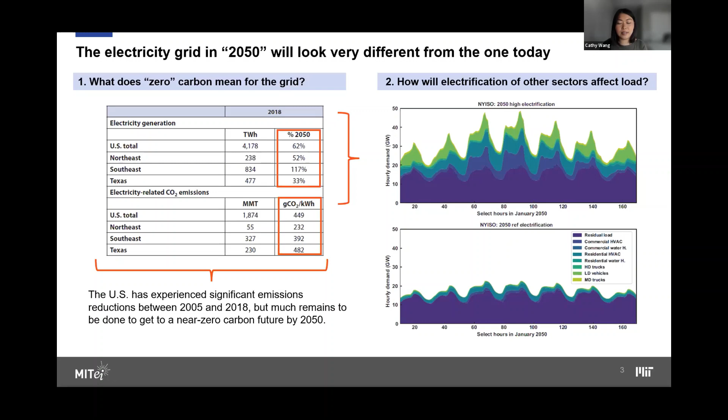And so like other state-of-the-art capacity expansion models, GenX has the capability of modeling operational detail of thermal fleets. So, I mean, oops, sorry, going back here, of up and down ramping rates, as well as different ramping times. And it is also able to do very high temporal resolutions, and we do that on an hourly basis for both demand and our VRE capacity factors.

We are able to model both demand side and supply side resources, and are able to expand upon the existing transmission network by using this configurable network and market representation.

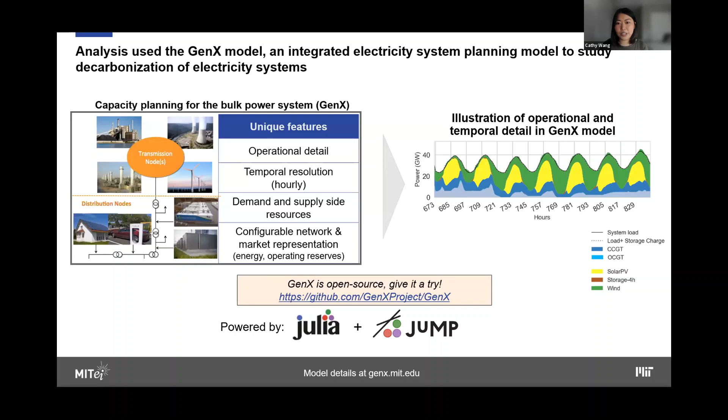So we explored the role for storage in power systems for 3 key regions in the US: the US Northeast, which is made up of New York and ISO New England regions, the US Southeast, and Texas. And we have selected these 3 regions because they all have very different starting points in terms of their grid emissions, but also because of different policy and resource availability criteria.

So in the Northeast, most states have pledged to reduce their emissions by at least 80% by 2050. And due to the electrification of heating, it is likely to go from a summer peaking system to a winter peaking one. There are well-documented siting difficulties for both onshore VRE and transmission developments, as well as the availability of low carbon hydropower from Canada.

The US Southeast is characterized by being made up of different vertically integrated utilities, and there is a significant nuclear fleet, which contributed 28% of the region's power generation in 2018. So nuclear is most likely to be given a second license renewal, making them still available for use past 2050.

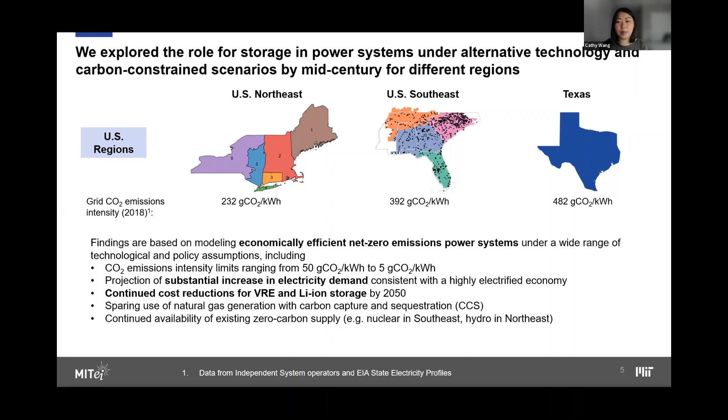We assume sparing use of natural gas generation with CCS technology. And given that most of the existing fossil fuel generating plants will have retired by 2050, we assume mostly greenfield conditions for evaluating these systems, with the exception of hydropower from Canada in the Northeast and some existing nuclear capacity in the Southeast.

So here are the first sets of results where we're considering using today's commercially available technologies. So utility scale solar, wind, natural gas plus CCS, and lithium-ion battery storage as the only available storage technology. Here we see that near complete decarbonization of the electricity system is feasible from an hourly energy supply and demand balance perspective, which is quite encouraging, using renewables, natural gas, and lithium-ion only.

We evaluate different emissions constraints. So the no limit, meaning no constraints, serves as a benchmark for assessing the impacts of imposing incremental emission constraints. And we see that as emission limits tighten, natural gas is incrementally replaced by VRE and lithium-ion buildouts as expected, as well as gas and CCS capacity, mainly in the 5 grams of CO2 per kilowatt hour case. This overbuilding of VRE really allows for a relatively short duration requirement for lithium-ion batteries on a scale of 2 to 4 hours of mean system load.

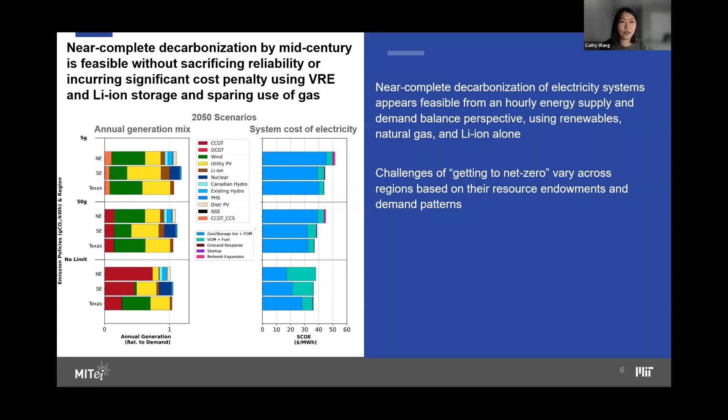And this is compared to Texas, where it has much higher levels of VRE deployment, even at the no limit case. And this is because Texas has higher quality VRE resources. So this really illustrates the challenges that system planners are faced with, which is that they need to take into account these differences across regions in order to make tailored plans for decarbonization.

The next set of results reflects the impacts of emerging LDES technologies. So I think this is a summary slide of what was discussed earlier in the session, where we have electrochemical, mechanical, thermal, and chemical storage types. But our experimental design is really aimed at understanding the relative merits of different classes of storage, not necessarily picking a winner. So rather than evaluating all of these different technologies, we classify them into 3 main classes based on 3 key design attributes, which are discharge capacity cost, storage cost, which is the dollar per kilowatt hour figure, and round trip efficiency.

So in brown, that's what I would define as class 1. These are mainly the lithium-ion batteries, which are characterized by their high storage cost, low discharge cost, and high round trip efficiency. Class 2, which are mainly composed of redox flow batteries, are characterized by middle of the pack storage costs, discharge costs, and round trip efficiency. And then finally, class 3 technologies, which are made up of hydrogen, metal air batteries and thermal storage technologies, which have very low storage costs, but high discharge costs and low round trip efficiency.

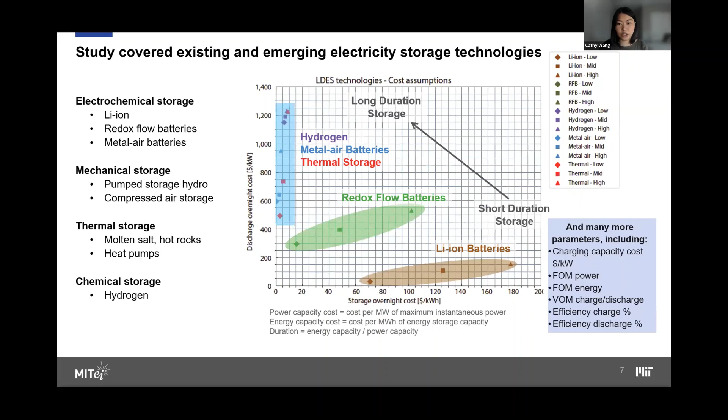So let's take a look at the impacts. Here, looking at the legend, it goes from base case, which is lithium ion only, class 1 storage technology. And then the next one is plus the class 2 storage technology, which is redox flow batteries. And then the next 3 are the impacts of adding 1 of the class 3 storage technologies. So again, we're not picking a winner, we're just evaluating what is the range of impacts of operating these 3

classes of storage technologies. So first, we see that LDES really substitutes for natural gas capacity. It increases the value of the variable renewable generation by reducing the curtailment of VRE and decreases electricity price volatility, which will be covered in tomorrow's session on regulatory frameworks.

A question that we get asked a lot is, what does long duration energy mean? What types of durations are we seeing? And from this model, we see that the storage duration for LDES resources range from 39 to 59 hours, so not as long as the weekly and seasonal sort of durations that many folks are talking about, but rather on the scale of days. So this is compared to lithium ion storage duration of 1 to 2 hours.

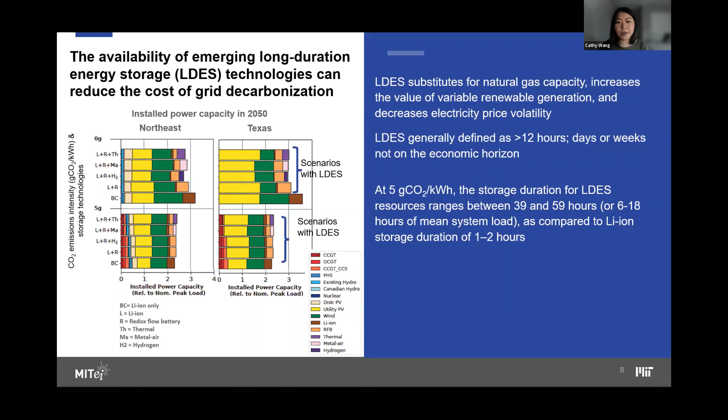Next, looking at cost, we can see that as long as some emissions are allowed, it is optimal to have gas and CCS capacity. These have very low capacity factors on the order of 2 to 5%, but they're important in these long periods of system stress where we have continuous days of low wind, for example. Thus, the cost impacts of LDES are greatest when natural gas generation is not an option, i.e. at the 0 grams of CO2 per kilowatt hour scenario.

But again, it is too early to pick a winner among these emerging LDES, and we recommend that more R&D is put into all of these different classes in order to have a more wide-scale, commercially available technology to be used before 2050.

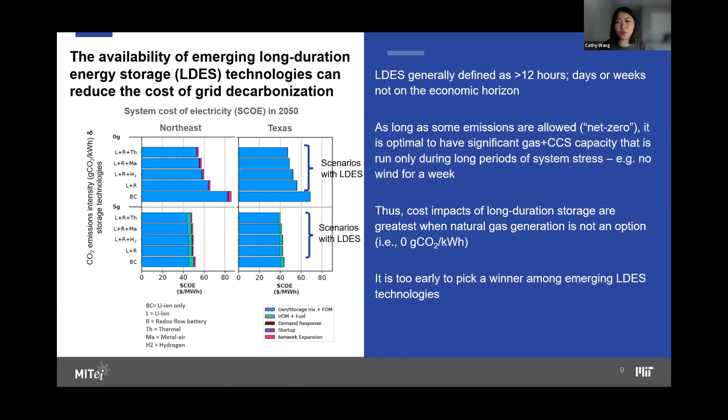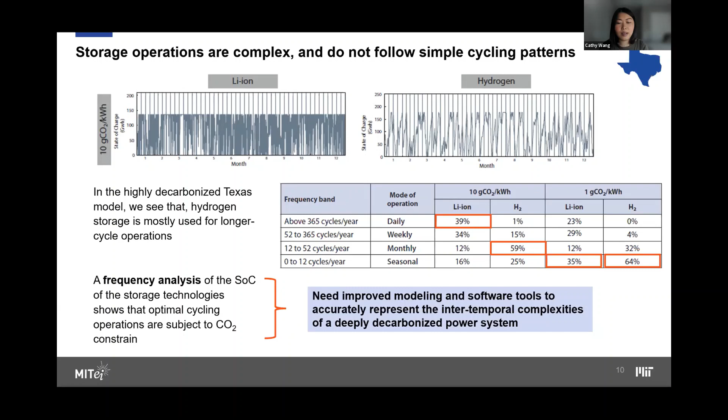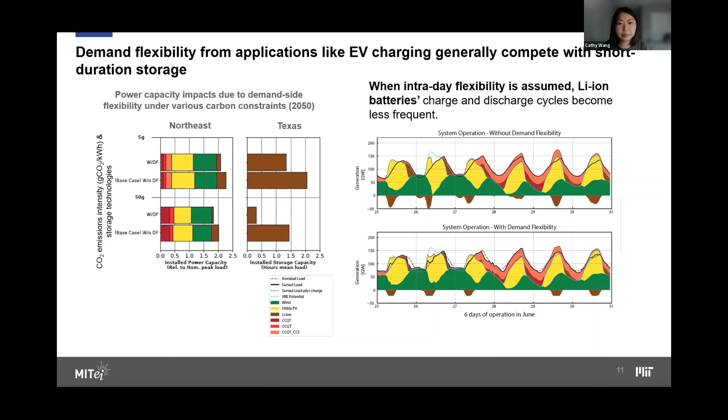So I think that is fairly straightforward, but demand flexibility at a large scale can also serve as a substitute for the need for energy storage. And as Emre alluded a few moments ago, here is an expanded role for hydrogen for use in other sectors beyond use just in the power sector.

And so under this sort of framework, we can assume that a portion of industrial hydrogen demand is met by electricity. So these are what the 25 to 100% indicate, with 100% corresponding to 19.7 gigawatt hours of hydrogen demand in Texas. And within this framework, storage can provide hydrogen either for industry, so going from grid electricity, electrolysis to hydrogen demand for industry, or it can serve electric load, which goes from electrolysis to storage to H2 back to power.

And so, in other words, hydrogen for industry and heavy duty transportation can be produced either directly through electricity from the grid or through electricity from storage. And we can see that this sort of flexible production of hydrogen for other sectors can improve asset utilization, as you can see in the electrolyzer capacity factor chart. You see that as we use or substitute more of the hydrogen production using electricity, we're increasing the utilization of electrolyzer. Same goes for the hydrogen storage component.

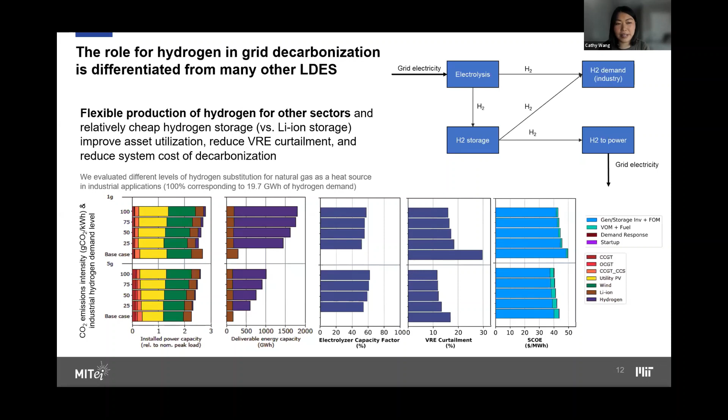We reduce VRE curtailments and reduce the cost of decarbonization by reducing the system cost of energy. So I think this is a pretty important point and really signifies that hydrogen storage has sector coupling capabilities beyond just the use in power sector.

I'll just drop in a quick note about the availability of low carbon dispatchable generation and how that also competes against VRE generation and lithium-ion storage technologies. As I said previously, we assume that in the Southeast, there is still the existing fleet of nuclear. We see that the system cost increases 6 to 15% without the availability of the existing nuclear fleet. And that capacity really substitutes for the overbuilding of VRE resources.

We did test allowing the model to add new nuclear capacity, but we don't see any optimal economic deployment at the current assumed completion cost of $6,000 per kilowatt. If we were to assume lower costs and ultra low costs from the 2018 MIT Future of Nuclear study, we do see some deployments, but really it is competing against the very low cost of VRE generation and the reduced cost of lithium ion battery.

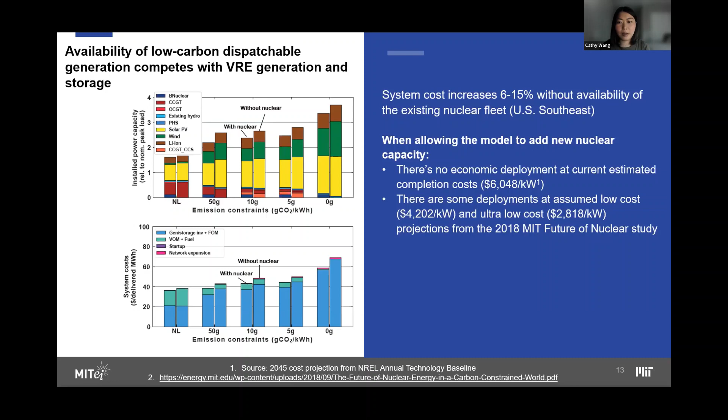And then finally, the final substitution for storage that we considered was transmission expansion. We know that transmission expansion plays an important role in reducing decarbonization costs and directly competes with storage. And this is very well illustrated in this analysis by Brown and Botterud, which is featured in the report, in which they show that the most connected scenario, so the one highlighted in red, deploys only 23% of the energy storage used in the isolated state scenario. And this is obviously associated with significant reductions in system cost of electricity.

And this indicates that regional coordination of transmission planning has benefits. It mainly allows increased VRE deployment in regions with higher quality resources and connects them back to the load centers. And it improves VRE integration by smoothing the effects of geographical differences. But given the difficulties in siting new transmission and enabling more coordination, there is still a role for both better planning of transmission and an expanded role for energy storage.

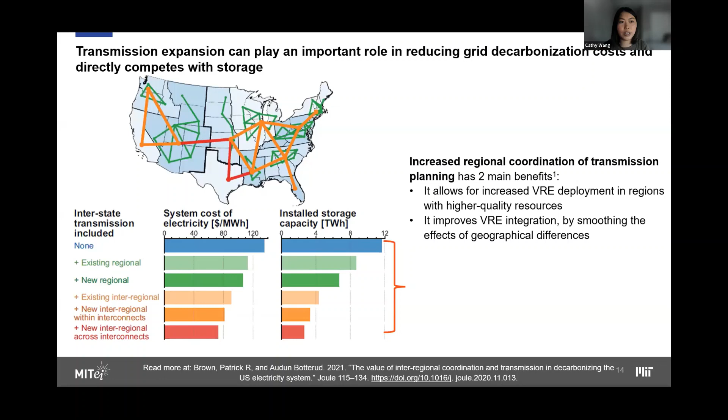So in the next few minutes, I'll basically try to summarize our analysis from the systems modeling perspective, looking at the role for storage in emerging markets. And I'd just like to acknowledge my contributing co-authors for this chapter, Marc Barbar, who was a PhD student in electrical engineering, who led most of the work here, along with Rob and myself participating in the study.

So we focused on two different classes of emerging markets as being representative of the wide diversity of system conditions that you would find in many emerging market countries. And so, we classify them as demand-driven regions, such as India, where generally power supply reliability has significantly improved and is approaching levels similar to what you would see in the US and other parts of Europe.

But in these regions, you're also seeing rapidly growing electricity demand, driven largely by economic development and adoption of a large number of energy-intensive appliances like air conditioning. These systems also tend to have large shares of fossil-based generation, predominantly coal in the Indian context. But India also is uniquely resourced with high-quality solar resources. So there's a lot of interest in deploying high renewables capacity over the next decade, continuing from the progress that's been made to date.

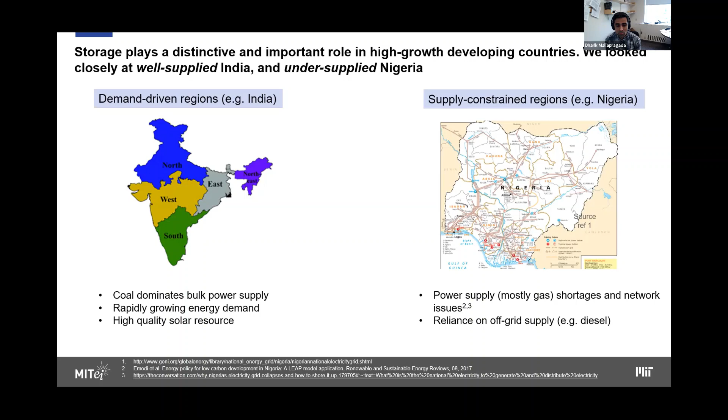And so there is naturally a reliance on off-grid supply sources, predominantly diesel-backed generators, but also increasingly microgrid-based applications. So storage use cases in those networks and systems are likely to look very different from the demand-driven example in the Indian context. In the next few slides, I'll highlight some of our key findings from the analysis that we did for India, and then contrast that briefly towards the end with the situation in supply-constrained settings.

Just a little bit more background about why we think India is an interesting market to study for this particular application, and in particular for thinking about energy storage adoption. There are a number of projections around electricity demand growth in India, and one of the striking elements of these projections is that unlike in the US and parts of Europe, where electricity demand growth is primarily expected to come from electrification of heat and transportation, in India the building sector dominates new electric demand, and much of this is coming from air conditioning adoption.

We already see these types of trends in hot and arid regions like the Southwest US, where generally speaking, air conditioning loads tend to be about half of peak demand, which happens during summertime. So this is not inconsistent with prevailing trends around the role that ACs can play, but how air conditioners are adopted, the types of air conditioners adopted, as well as the utilization patterns, mean that this could particularly be a challenge in the Indian context.

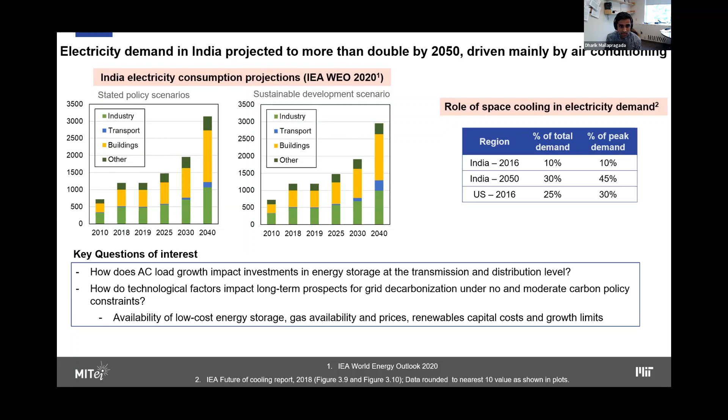This bottom-up characterization model is not meant to be a forecast, but rather a scenario generation tool that allows us to input a number of different assumptions around economic growth, technology, and weather data, to then look at how that manifests in terms of changes in load demand that can be used for system planning efforts, both at the distribution level and at the bulk system level.

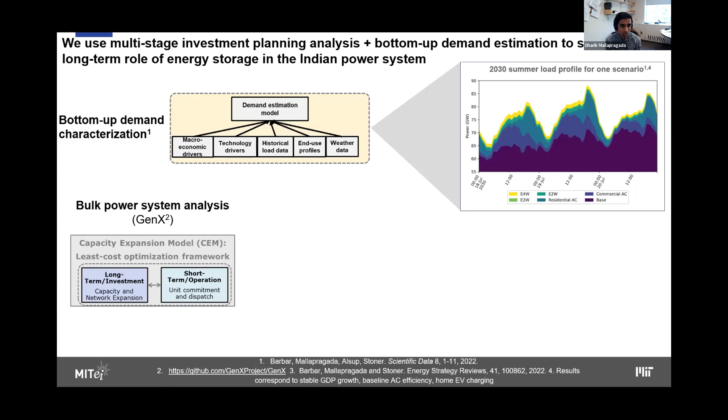The subsequent component of the analysis was very similar to the framework that Kathy described, which is looking at capacity expansion models using the GenX electricity system model for the bulk system. In parallel, we also performed a distribution and network planning analysis using a real options-based approach, which can be particularly insightful as we think about the role for storage as non-wire alternatives to manage load growth in many urban distribution networks.

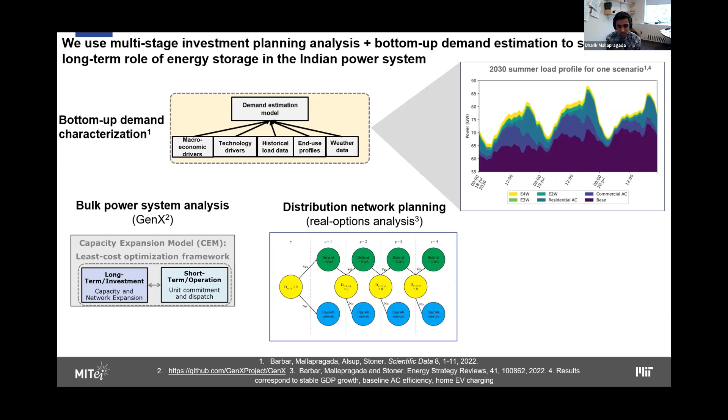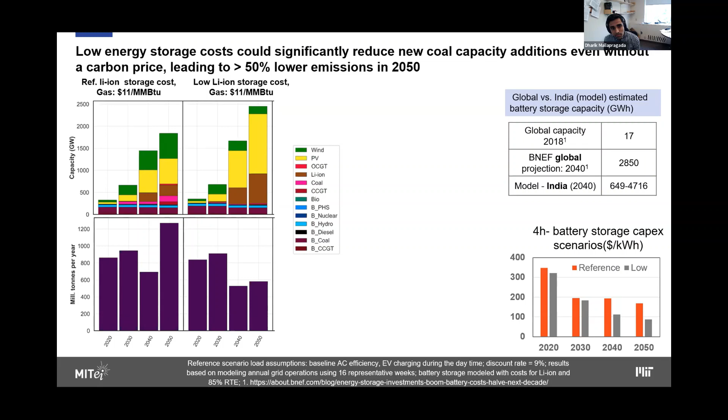And so the overall story here is that yes, your annual electricity consumption declines, the peak declines, which means you need to deploy less new capacity, but because the demand profile structure changes from the peaky profile seen in the reference scenario, and is more akin to matching baseload generation, we tend to see an increase in emissions intensity on the whole, because coal generation looks more favorable in these scenarios, and you need less energy storage, but also less solar deployed as a percentage of total generation.

So we have this counterintuitive effect here, where focusing on demand side efficiency measures, while ostensibly a good thing, without accompanying policies to manage emissions on the supply side, could have these undesirable effects, where emissions intensity could actually increase under some of these demand side measures.

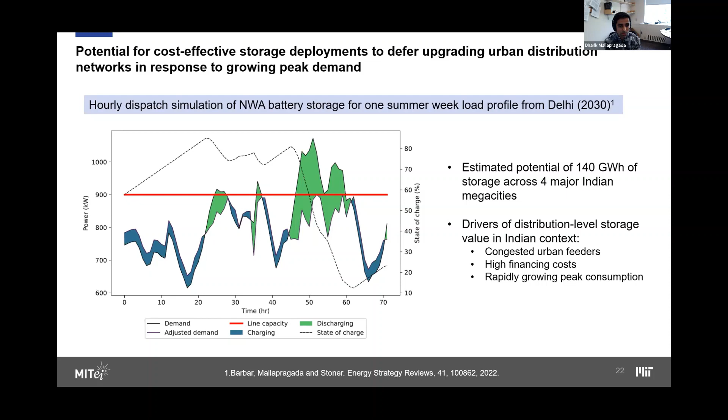But I think the important dimension here to focus on is that in emerging market contexts like India, where you have these very congested urban feeders that are more heavily loaded than, say, feeders in the US context, this use case looks more attractive. And this is further compounded by the fact that because cost of capital is relatively high, wire upgrades tend to look more expensive than energy storage deployment when thinking about these peak shaving applications.

And so we looked at a number of different dimensions where we focused particularly on the conditionality of storage adoption as a function of the nature of the frequency and reliability of the bulk power supply, which is really a key driver in this analysis. So in the case when you don't have any outages from the grid, or you have a pretty predictable nature of when grid supply might be available, you see a lot of storage being adopted in these scenarios to complement solar generation and to be able to shift the solar output to when peak consumption occurs, along with some continued use of diesel as part of backup supply.